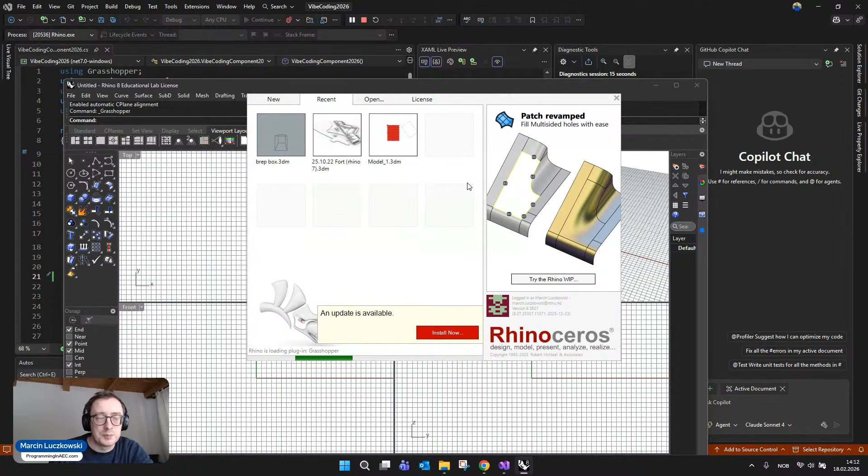Let's see if it's working. I'll click play on Rhino 8 Netcore, clicking here at the top. The code is debugged — you see Visual Studio starting to follow the process memory, and it's opening Rhino. I wasn't clicking anything to open Rhino, it should automatically pop out in your window. Now I can close the default file, and Grasshopper is opening.

The Kris Course 2026 category is already visible in my top ribbon. There's no icon yet, but in the vibe coding subcategory we have the Vibe Coding Component 2026. It has no inputs and no outputs, so it seems like everything we've done so far is correct.

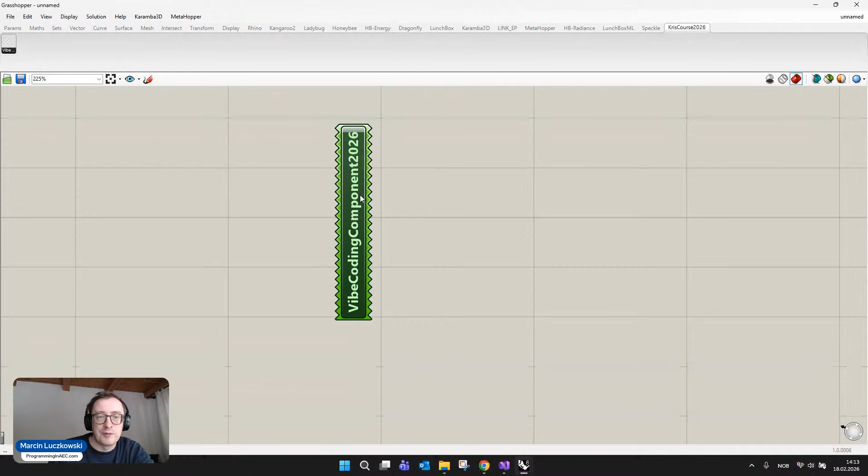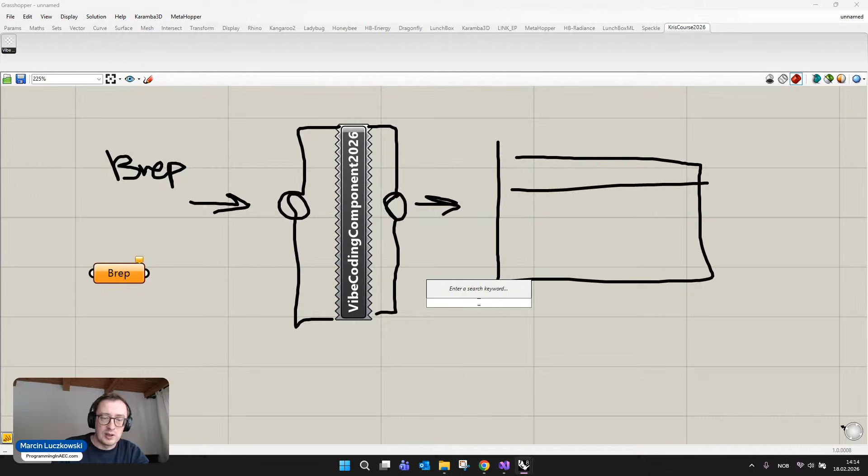Our task right now is to create some kind of input and some kind of output. To explain briefly, we'd like to have a BREP input here, and a string output connected to a panel which will produce IFC code. Later we'll change it into automatic generation of the IFC file. So we want a BREP input and a panel output. That's the task for at least the next half hour, up to one hour.

I'm going back to Visual Studio. I'll stop debugging, so I'll completely stop running the code.

I have GitHub Copilot. Some of you have the free version — I think if you installed Visual Studio recently, it should be automatically installed there, next to the Solution Explorer and the Git changes.

You probably don't have all the same types of AI agents as me, as far as models go. I like to use Claude, whatever version — it could be Opus 4.5. If you don't have Claude, you can use GPT 5.1 Codex. I'd recommend using the higher version of GPT with the Codex acronym, they're a bit better for coding.

But today we won't be creating a really complicated software architecture, so the choice of AI agent is, I'd say, a secondary question. The most important thing is to start working with it.

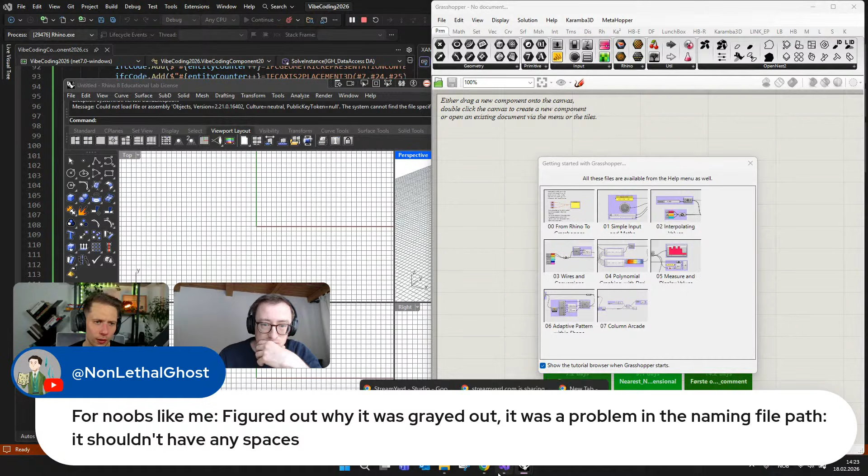We ran into a problem: the 'Creating a project has finished' option was grayed out. Someone already figured out it was because the file path name had spaces in it, which shouldn't be there.

Someone also asked why Visual Studio doesn't show the Grasshopper template, and which plugin is needed for that.

We explain this in detail in the movie we sent to all of you.

But just to let you know, you have to go into Extensions, then Manage Extensions, go to Rhino, and install the project templates for Rhino 3D.

We have a really great audience here — they already answered the question. You also need to restart Visual Studio after installing the extension.

One more question: how do you connect Copilot? Is it default in 2026? I think it is by default, because I just installed it and didn't add anything extra.

So it's supposed to work, but of course it would be nice to have a GitHub account, since GitHub Copilot is connected with GitHub.

It's hard for me to say if you need to be logged in, because I always log in, but I think by default the whole thing should work without installing anything extra.

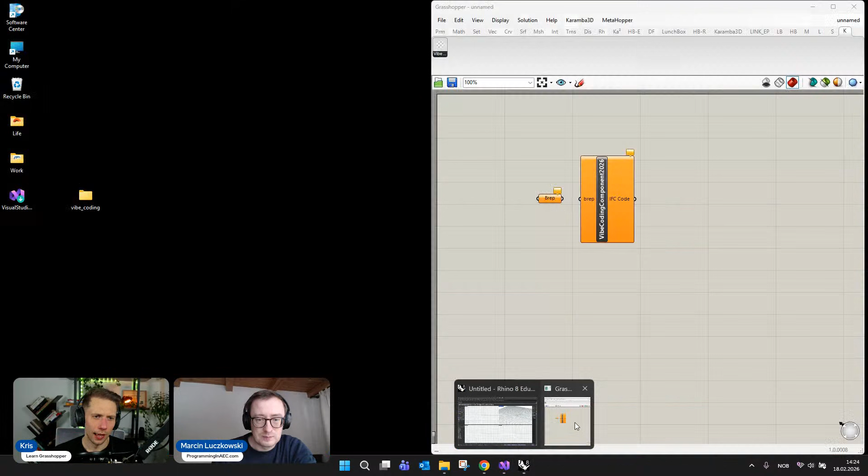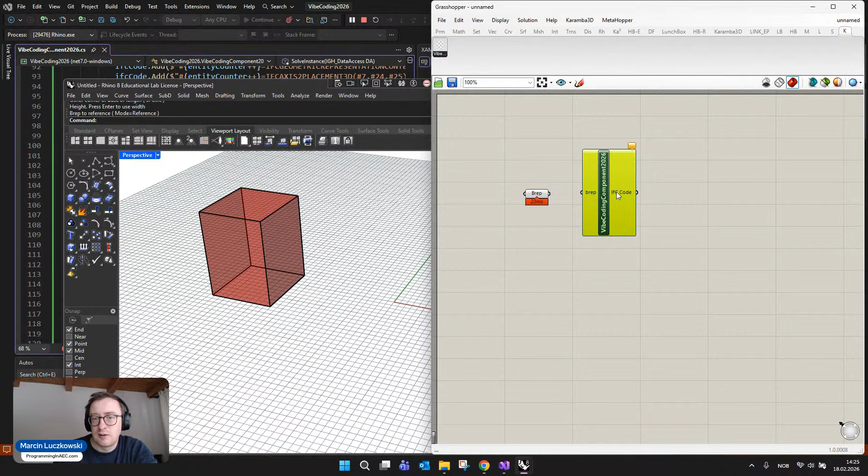Okay, so we got something going in Rhino and Grasshopper. As you can see, we added an input and an output — the input was manually created by me, and the output was created already by the AI model.

Let's try to work with it. I just generated a random brep, some kind of box, and I'm bringing it into my brep container and connecting it to my Vibe Coding component 2026. A good thing is it's not turning orange or red — it seems like everything is performing well.

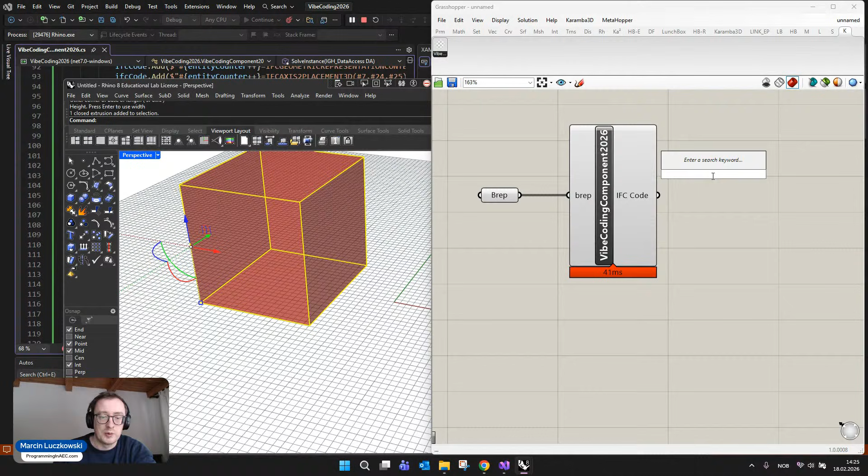Then I'll go for the panel and see the IFC code. The IFC code looks promising. I'll go from the beginning to the end — it seems like something which could possibly be an IFC file, but let's try to validate it.

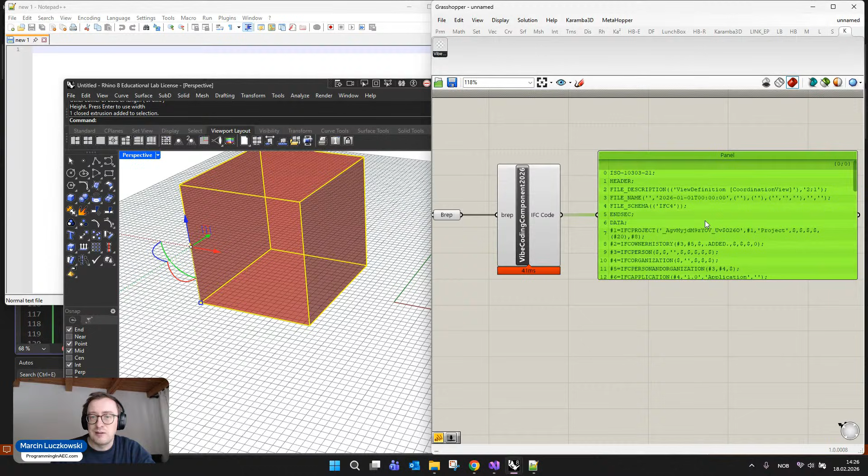To validate it, I'll open Notepad or Notepad++, whichever kind of Notepad you prefer. I'll copy the data from the panel and paste it here.

I'll save it as an IFC format, going into my Vibe coding folder and naming it model1.ifc. After this change, I should have model1.ifc in my folder — the file icon looks correct, but let's see if it's actually working correctly.

I'll open the browser, whichever one you're using. There's a very nice thing recently done by the Building Smart community — the Building Smart IFC verification, I think it's called.

Yeah, the IFC validation service — something like 'Validate IFC now.' You don't have to have an account there, I believe, or if you do, you can create one.

You can upload any kind of IFC file to see if it's properly done according to the newest standards. So I'll bring my IFC file, upload it, and validate it.

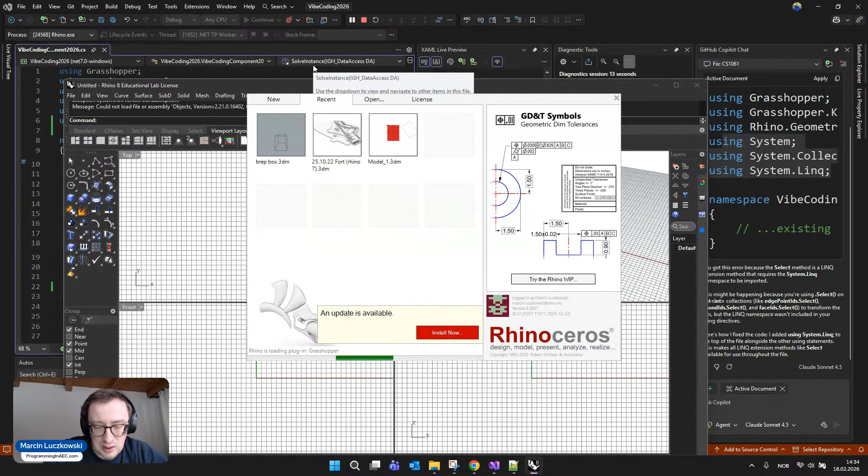The integration with GitHub Copilot is extremely efficient when coding your own components in Grasshopper. It's incomparable to using a classical ChatGPT in the browser and copy-pasting files from there to here. But obviously that's also possible.

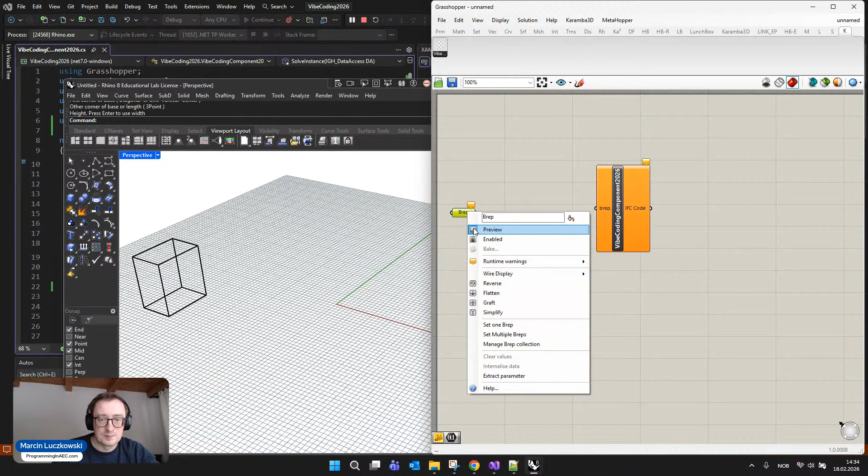Let's try if the code will work now. I'll create some random brep, take the code, copy data only, and put it into the same file. I'll just save it.

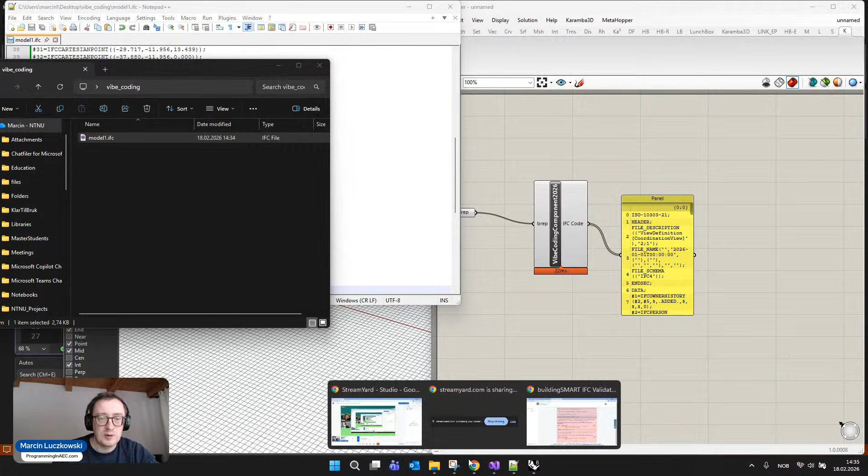Let's see, I generated it right now, so it should be fine. I want to revalidate it, to see if I fixed all of the issues. Probably not—I don't think he'll fix all of them. I'd be shocked if he did, but this is generally how we have to do it until we see the IFC model. Well, he even created more issues here, something expected.

I'll first check the normative IFC rules. He created 3 issues here, and also one with the IFC schema. Let's see how many there are. Again, exactly the same thing—first I'll fix the IFC schema rule.

I'll copy it and put it into Copilot, saying that the code is working better, but I still see some mistakes.

Please check the images. Well, I try to be as polite as possible, not because I'm afraid terminators will come some years and kill me because I was too harsh on the AI model. It's rather that I like to work this way also with my partners at work, so I try to be as humble and polite as possible.

I'm just copying this data. Right now I'm doing it a little bit manually, as you can see. In a second we will create an extra code which will save it as the IFC. The reason I want to do it like this right now is because I want to control where the error is. If I were very positive about the AI models, of course I could try to do it from the beginning with one big prompt and wait for the perfect solution.

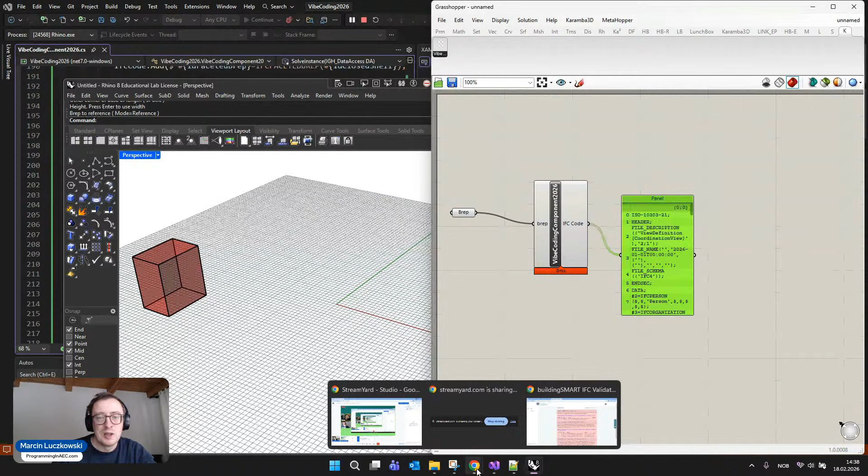But I will tell you truly, it was never working until now. We can change this kind of methodology at the end of this tutorial, or you can also check it by yourself. But yeah, let's try to see that the IFC has been generated.

I will go again into the IFC validation of the file. I will again put here my model1.ifc. I am waiting for at least 2 green marks, but you never know.

So in the meantime we have some questions, so maybe we can answer. Does this work with Visual Studio Code? Very good question. The whole workflow - the Visual Studio Code I'm mostly using for Python coding.

I was trying with C#, but still I think for C# Visual Studio will work much better. Well, I think the new Visual Studio Code - I don't want to lie, because I was using it half a year ago - there was a possibility to create plugins, but not in such an efficient way. It means you couldn't break it, you had to rebuild it always. So you were wasting some, I don't know, 20-40 seconds, and you had to open Rhino a little bit more manually, but maybe something has changed.

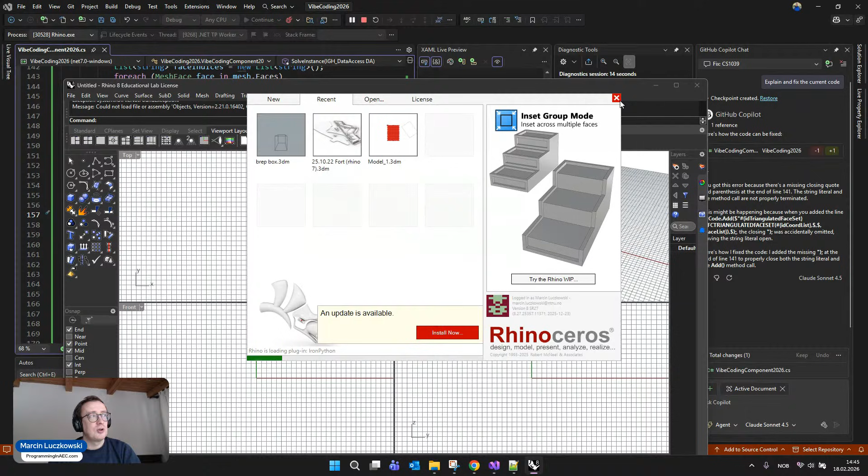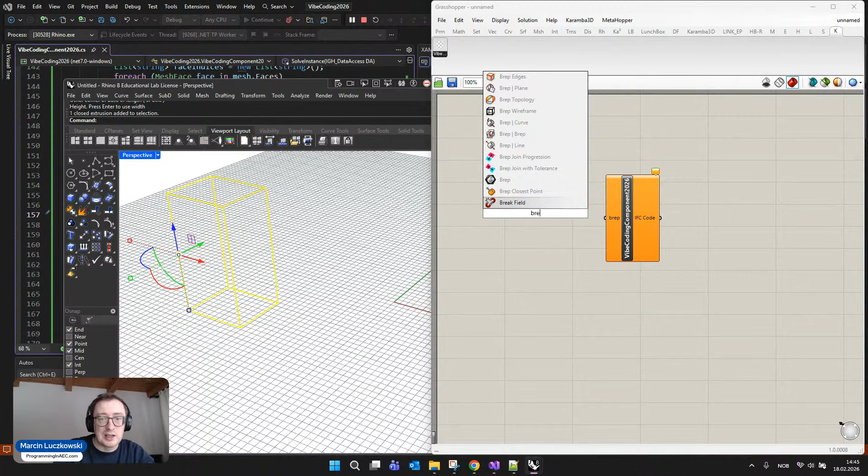I will not lie to you, in more complicated codes very often he's proposing wrong solutions, but still I think he will get better and better. The more you work with it, the more you know what you can expect, and the more you know how to push him to give you a better solution. But also, I don't think a person without any C# coding skills can really code even with AI models, but maybe this will change as well. Maybe I will have to change my job soon as well.

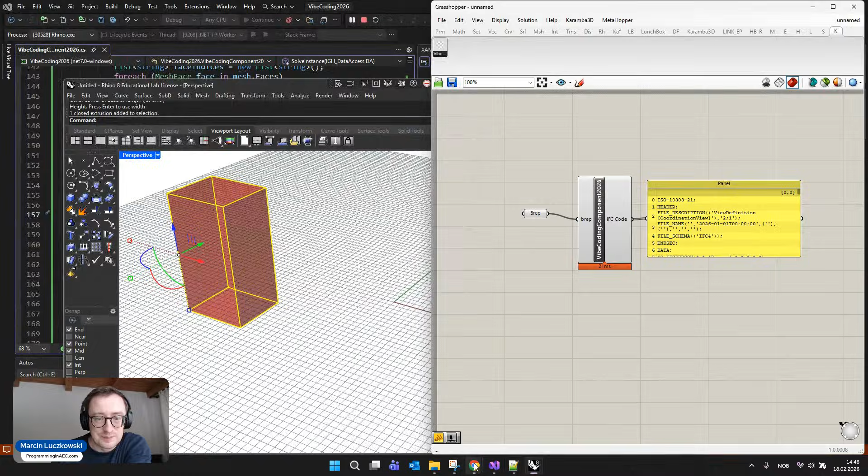Well, let's go and check the file. I'm saving it. Hopefully this is the last time when I'm validating it, really. Even if it's not fully perfect, I think we can try to preview it. So I will just take this IFC. Sorry for that, I was too fast in dragging and dropping the file.

Also, you can see that the first time when we pushed it here, it was around 2 kilobytes. After some iteration, it has 4.8 kilobytes, to make it accurate into the step syntax, IFC schema, and the normative IFC rules. So hopefully soon we'll have a perfect file. Well, not yet, but let's see the IFC schema, one last mistake.

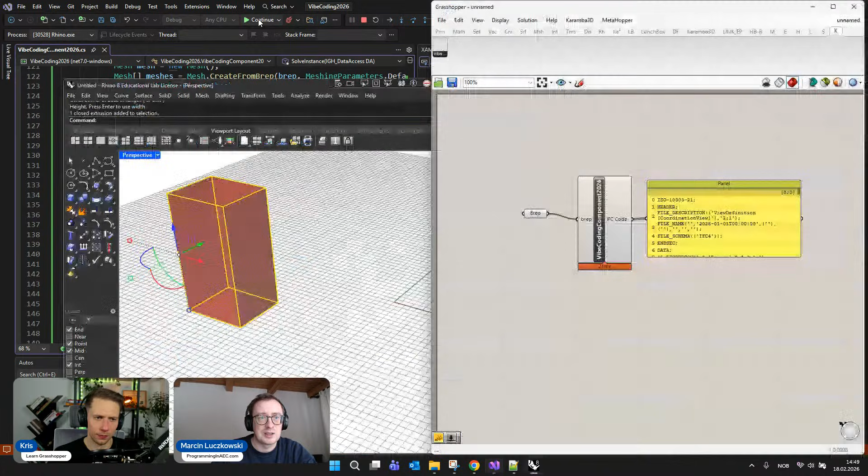Obviously he's connected to the internet and has access to all of the available IFC formats. So in my opinion, with at least how it is sold right now, that AI can do almost everything for you, well, it is showing that it is as good as the validation and the project which you have to do anyway.

And we have a good comment to that. Richard said: though vibe coding is handy in producing code quickly, knowing how to code is beneficial in guiding and prompting the AI correctly. This is also an outcome of this session, that even though code, as Marcin said, can be produced really quickly and really great, you have to validate and check it at the end. So programming basics are really necessary here.

Richard also mentioned the hot reloader C# component. Have you tested it, Marcin? He wrote that there is no need to break and restart the debugger in order to test new changes to the code. This also avoids restarting Rhino Grasshopper.

I don't know if it's because of the project I was actually testing it on, since it was quite a decent project, but in my case it didn't work so well with this hot reloader. With small plugins like we're doing right now, it works perfectly, but on bigger projects, when I have to communicate with different individually made libraries, I was not satisfied.

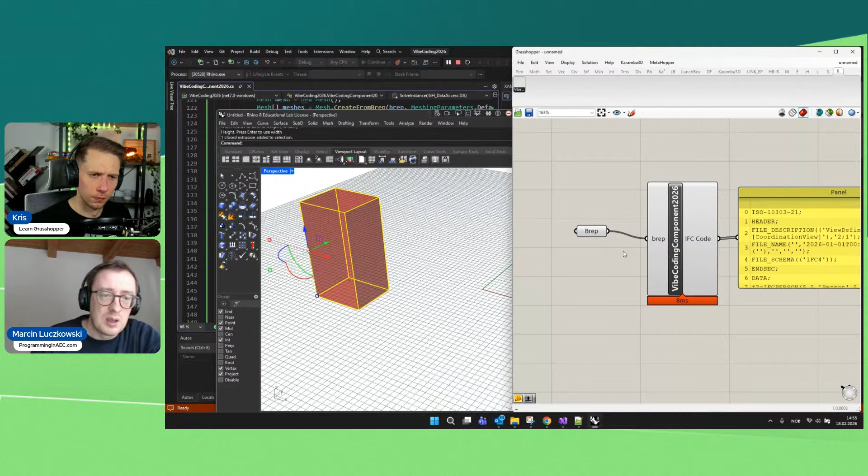To do that, I will just stop debugging for a second. I want to work with Copilot and ask it to do a couple of things. First, I definitely want to have production of the IFC file in a specific folder. So please make me one more input. The input should be the file path for the IFC file, which will be automatically created when I am adding new breps.

The second thing is that the brep input should now be using not only one, but a list of possible breps. Apply those changes in the main.

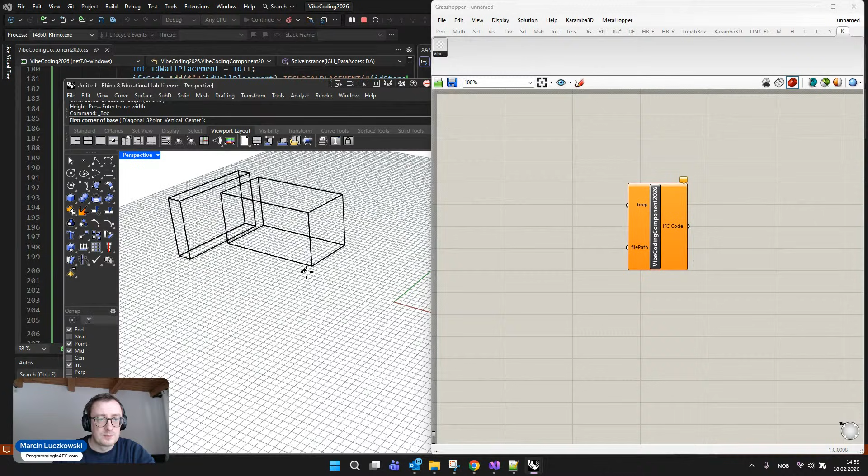Let's see. I will also just test it with some breps. The file path — let me select maybe an existing file path. I will just go into my... where is my vibe coding stuff? Model 1 IFC, let's open it.

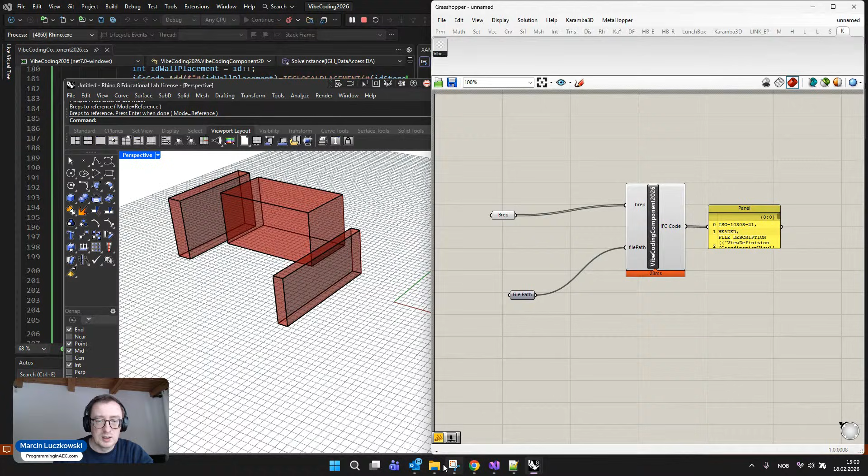IFC code — well, I don't have to, I'm just checking if he produced it, but generally here we should see that it's already created. Yeah, 3 o'clock almost. So the only thing I have to do right now is move back into the viewer, and I would like to upload a new file — I want to bring my IFC here. Let's see.

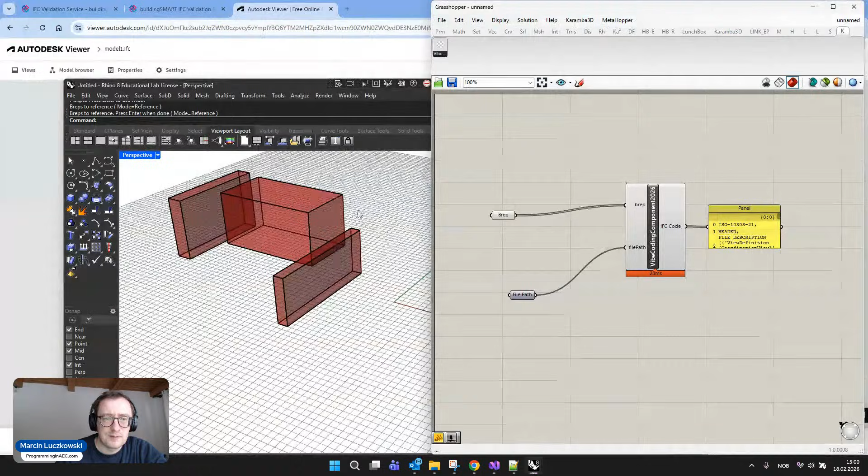Hopefully this will work in a second or two. So, is it exactly the same? I believe they are a little bit farther from each other. So one problem here — probably he's using a new coordination system for each of the objects, and we have to tell him to use one global coordination system for all of the objects. Let's try to see it in the code.

I will just pause it for a second. So, I should use the vibe coding — I should use the AI model to do it. So, the code works...

Very well, but I see that the objects in IFC are using a different coordination system. They are a bit too far from each other. Let's see — probably... I know this issue from before, so I'm quite sure he will fix it.

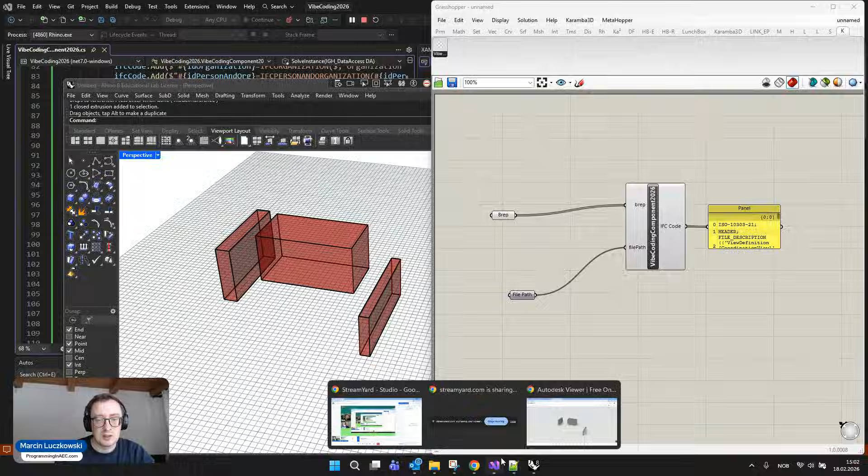But as you can see, still after some time, okay, so he's using millimeters, he's changing it to... okay, so he figured out that those are meters. That's also one other issue that I thought it would be, but he's right — if the distance is a little bit bigger, then probably this was the problem. So I'm just clicking recompute, opening the viewer, uploading a new IFC file, and let's see.

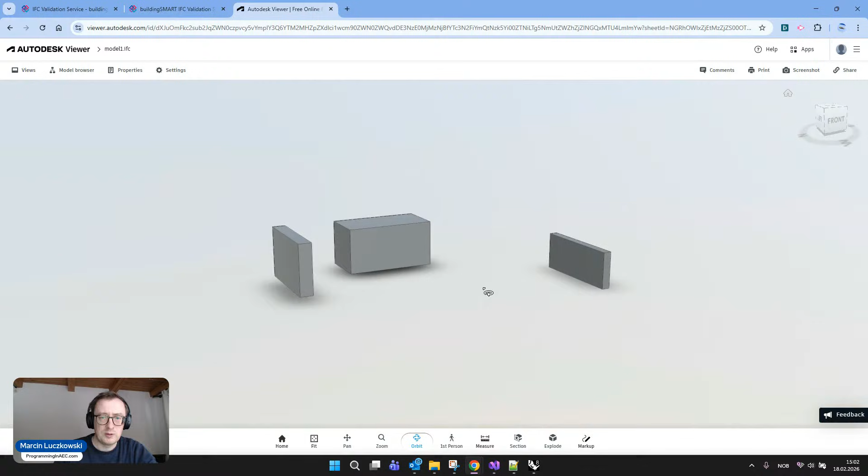Well, still too far away. So let's try to push him a bit more. I will just check if he was using the newest file, so I will go back into Visual Studio.

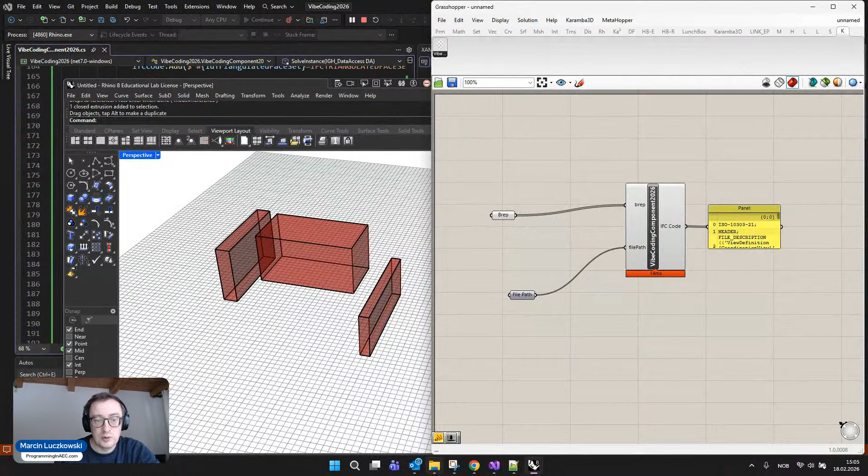I'll just break it and play it again. So after this small change, I can rebuild my IFC file 5 after 3. This is exactly the file which I want to use. And let's see.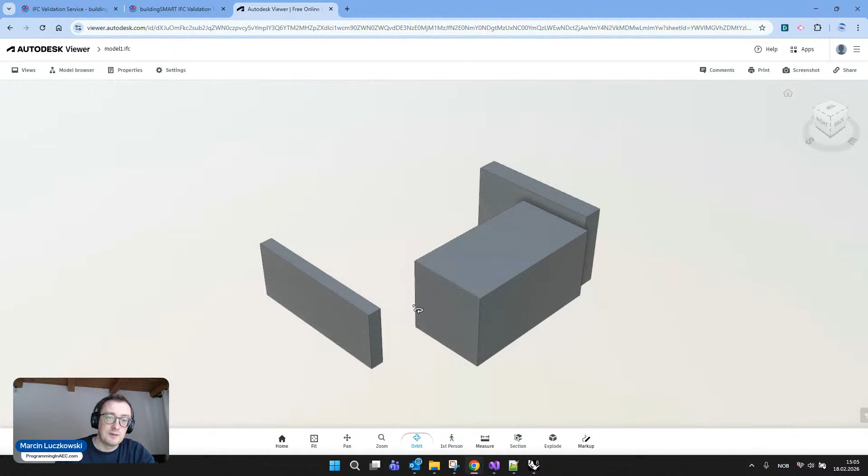All those small issues which are making all this, but let's see if it's... yeah, now it's much better. So what we can see actually here is that we create objects. We can just create a model browser. We see that we have the IFC site, building, story, wall, and then we have 3 types of the wall objects.

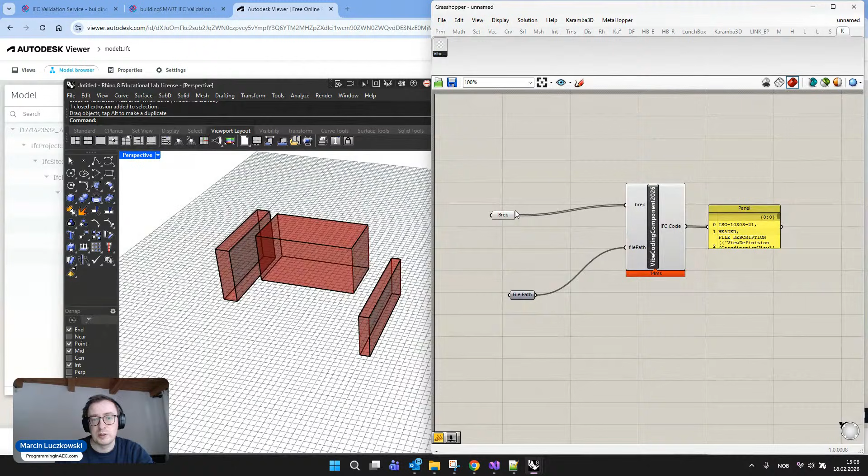So we created quite nice stuff. We created any kind of the BREP object, more like a wall system, and then we will try to create it maybe a little bit more complicated. I would like to have one input for the BREP walls, one for the BREP floors or slabs, and by this we would like to also create IFC wall and the IFC slab in the system.

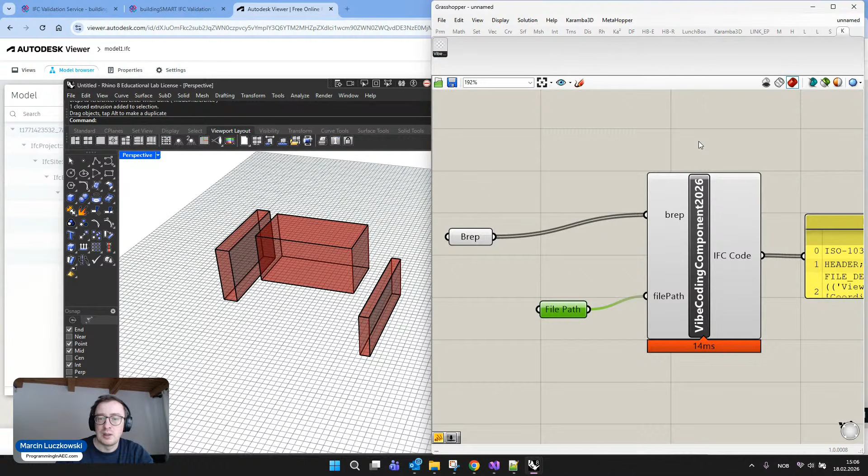So I will go back into the coding, and unfortunately I will just stop debugging right now. I don't want to just break it, because I want to apply a little bit bigger changes. I want to go also outside of the main instance of the class. I want to create some kind of the methods.

Well, the main code is working very good. I want to make some changes. I would like to have one more input, also a list of BREPs, but this time for slabs. Also, I want to have an IFC code adjusted to it. So BREP slabs are IFC... I don't remember if it's floor or slab, IFC slab category, I believe.

Yeah, and maybe one more thing. I would like to have one more output, and this should be warning, or not warning, but it should be information when the IFC is created, generated, and saved in specific folder.

If the code is working as predicted, let's see. We will have 2 inputs and 1 file path. I will go for the file path.

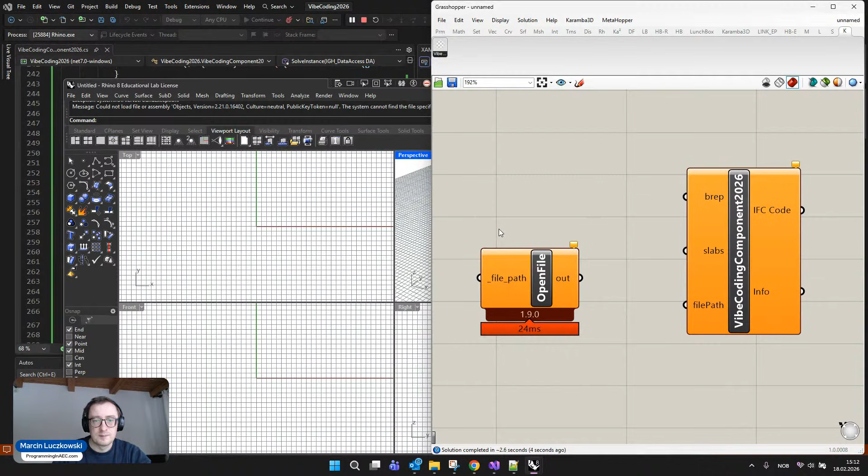So I will choose my IFC file. What I will do, I will also create some breps, maybe different for the...

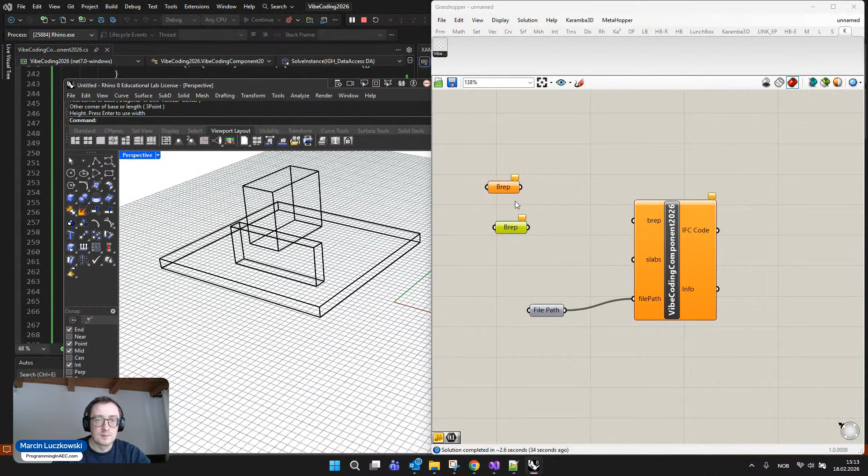I want to maybe just see if those will be the slabs, set multiple, and those two will be my breps. I should change it to the walls name, but let it be.

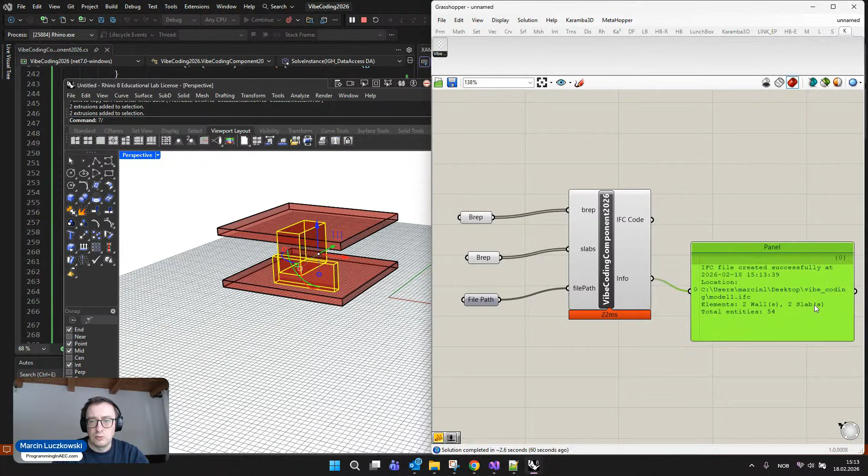Let's check the new output, which will be the information. And file created successfully: 2 walls, 2 slabs. Well, makes sense. Let's try to just validate it.

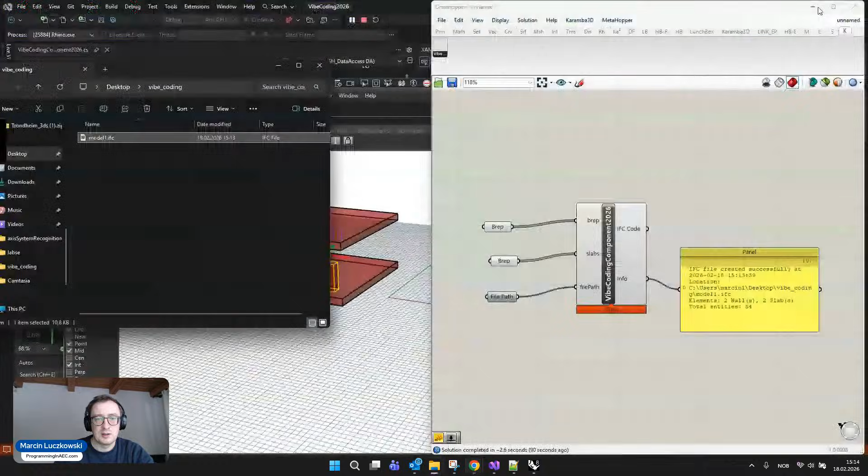I will just upload it here, and let's try to check if everything is working well. Yeah, seems to work correctly, so I think we can just believe that even for more of the objects, it would work as well.

Right now, let's try to - I will just save this Grasshopper file, brep to IFC, and I will just save it.

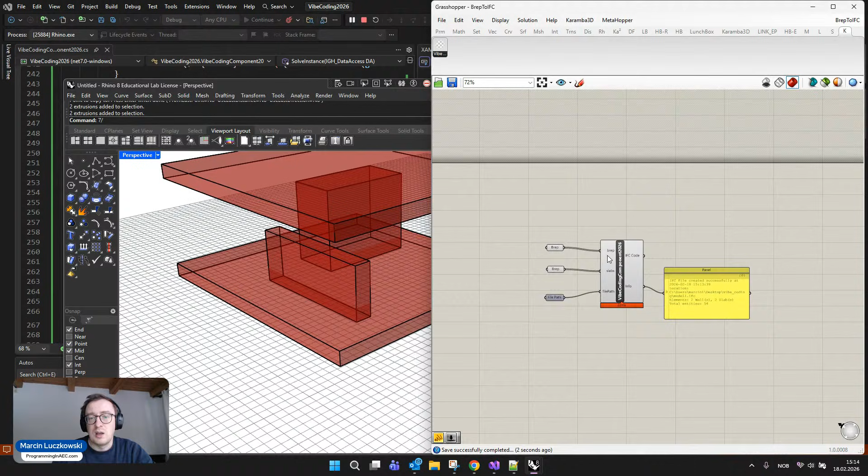Well, in that case, we have let's say 90% of the code ready. We are generating the IFC files. We know also how to add the new categories, or the AI model knows how to do it. So the next thing I would like to do is create generally a system in which he will try to automatically recognize if the brep is a slab or it is a wall.

So let's say like this. I don't want to modify this code. I want to create a new type of component, a second component. And in this case, unfortunately, I have to click stop debugging.

I cannot just break it, because I will be modifying deeply the architecture of the whole plugin. So in that case, I need to add the new component. I will show you how to do it.

Manually - I was searching for the word how to say it, not with the AI. So manually, I will go for the component, add component. I'm right clicking on the vibe coding, and then I will search for my Rhino empty Grasshopper component.

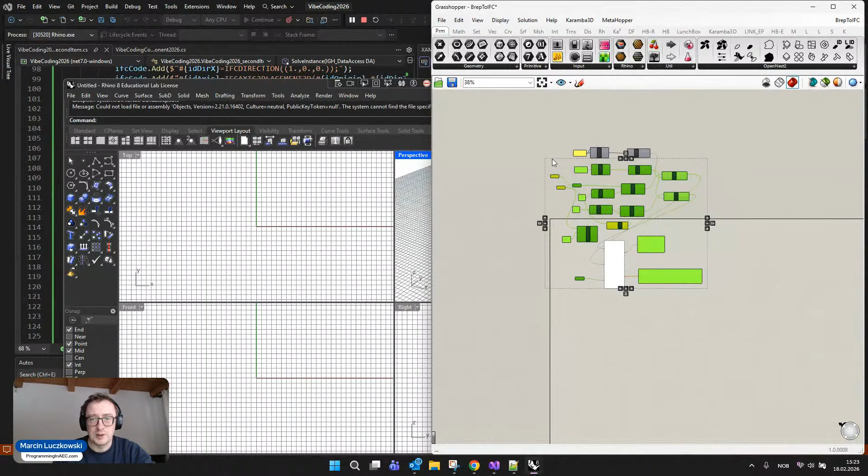So right now what we have, I can just use the brep to IFC, close, yeah. Sorry, it's my old code, I should not open it.

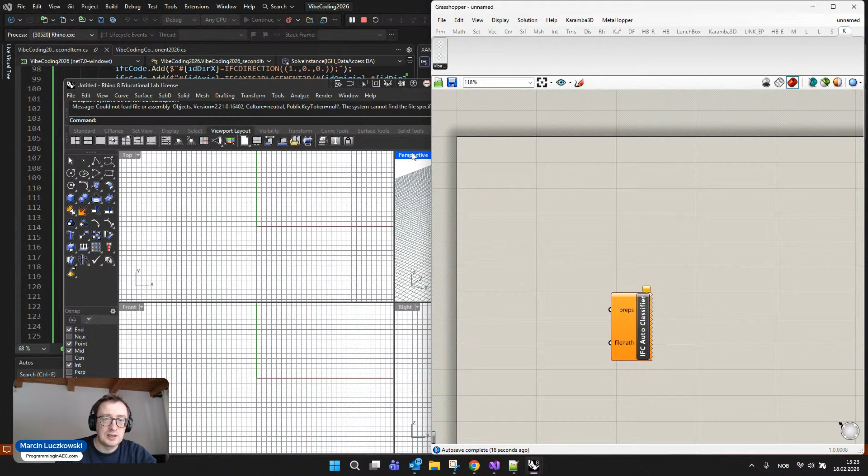Let's see, so right now we have two components: IFC Auto Classifier and the Vibe Coding Component 2026. You recognize this is the new one - we have breps and the file path. Let's try to use this one this time. As I was saying, it should automatically recognize what is what. Let's try.

Let's give it maybe also something here - brep. Those breps will come here. File path. Select the one existing - well, I will choose this one.

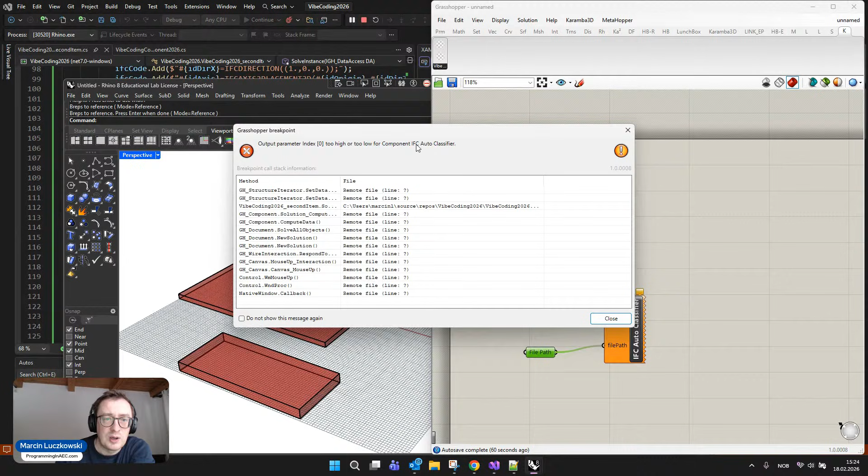Oh nice, so it has some issues. Output parameters index 0 too high or too low for component IFC Auto Classifier. Good, this means generally - or I can take a look if the code was... oh, it doesn't have. Okay, let's see.

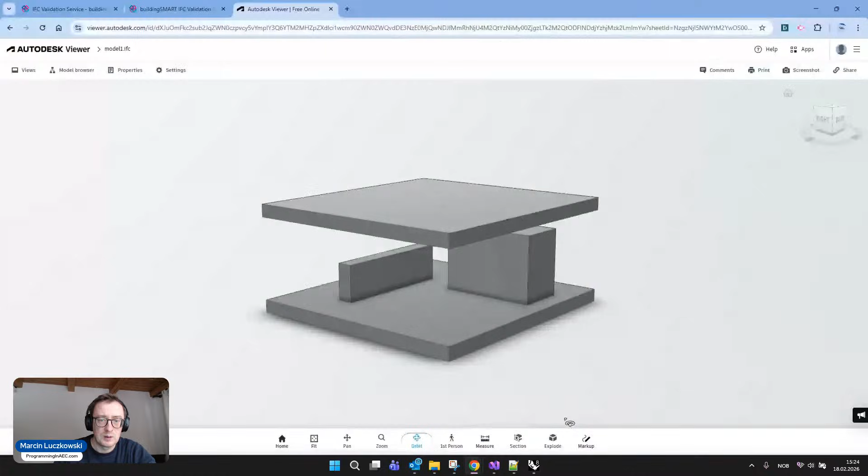Let's see, my vibe coding - 1524, this is exactly what I want to see. So I will just bring it here.

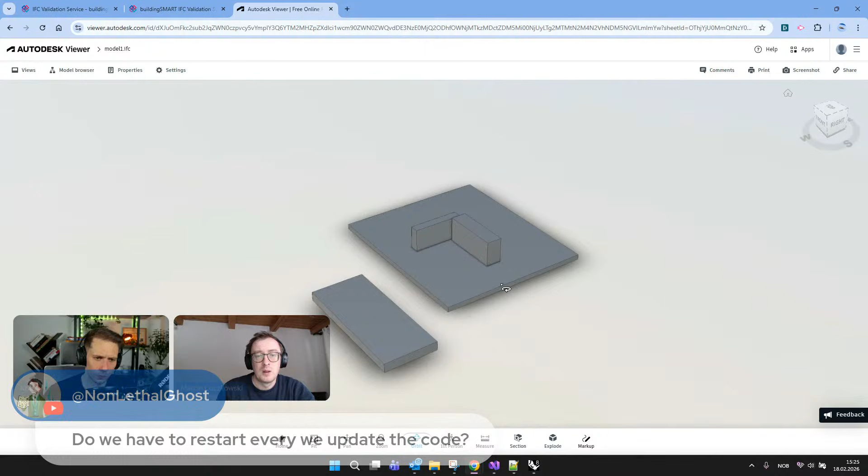There is a question: do we have to restart every time we update the code? Not every time - maybe I will just check in the model browser if it's done correctly. Just give me a second and I will come back to the explanation. So we see that although it looks like it exported the slab and the wall, everything is slab here.

So the code unfortunately is not working exactly like I would like it to be. But now let's get to the explanation about breaking, and how breaking works - or just stop debugging.

The rule is that whenever you're adding a new component, if you will - right now I can just break it, so Rhino and Grasshopper is not closed, it's still working, or it's in pause mode, let's call it. Then if I go into the Solution Explorer, right now I see for example one component and the second component which has been generated. I can modify them, but at this stage I cannot add a new type of component, for example, or change the classes.

It's pretty basic tutorial, so I don't want to go into class definitions and how you should create them. But to answer shortly this question, which could be really long - not always do you have to break. If you're making small changes, you can just break it and click continue inside of the solve instance. Whenever you're going to add a new component, then you have to rebuild the whole plugin - so you first stop and then rerun it again. And I think with hot reloading, it will be exactly the same very often.

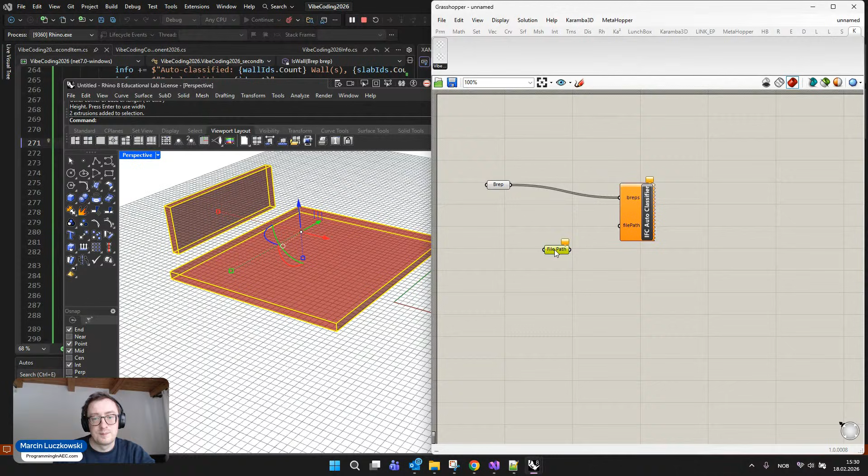I will connect the file path, and let's go for the Model 1 IFC. Oh, this is something which I thought I will fix.

Let's show me the code. It seems like he's still... oh, okay, now I see. This is actually the mistake which he has done. He is putting the DA set data list, the IFC code, and DA set data 1 info, but he never created, I believe, any output parameter here. So he's referencing something which doesn't exist.

Well, quick fix for it, I will just comment it out in break mode. It's not affecting on the... he's asking me to stop it because he's... so I can then just tell him: line 267 and 277, 268 is referring to non-existing outputs. This is a tricky part because until you run Rhino and Grasshopper, you will not see that this is a mistake. So you need these two lines of code, and then just keep it. Should be perfect now.

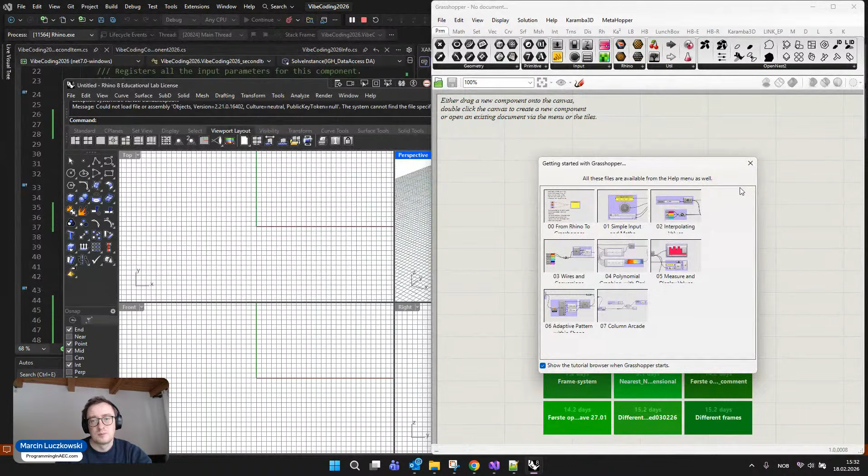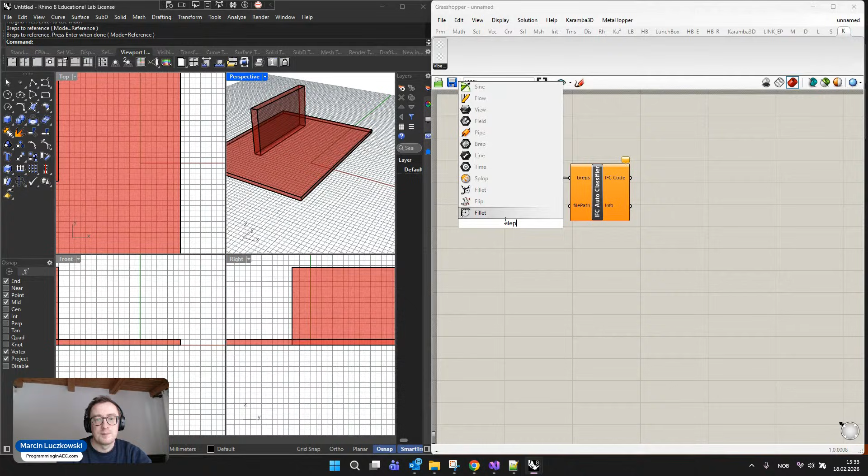Now, finally, we should have it. Hopefully the code will work as it should. Set multiple breps, the file path. The model is generated, the file we can take a look on. Hopefully they have correct categories, IFC categories.

This process can be really surprising for those who have been following AI and heard all the crazy news about what AI can do, and seeing in this live session how much back and forth, misunderstanding, and programming knowledge you need to have in order to program this. This can be surprising for many. Yeah, if we go into a discussion part, because slowly the code is finished, I hope he will succeed with this. But generally, the thing is that the coding...

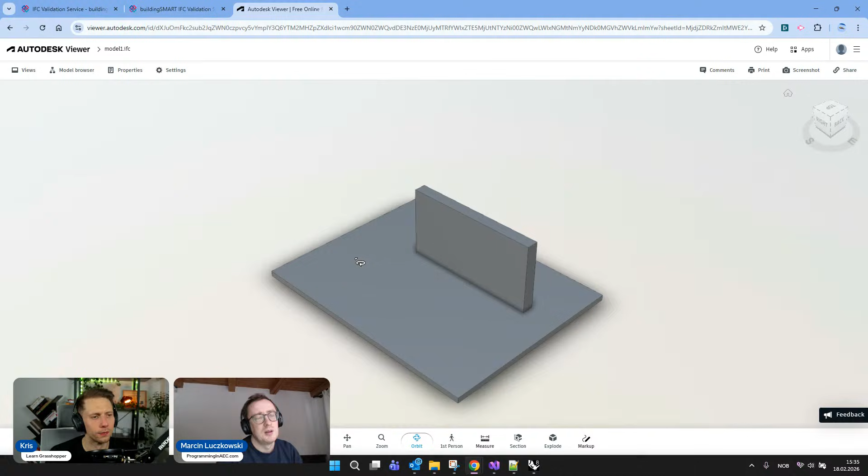For the IFC, we chose this by purpose, because the IFC format, although you might think it's a standard for the whole world, there are a lot of IFC files. When IFC 4 was released not so long ago, and now IFC 5 is slowly coming. So, let's see, I hope he managed to do it.

If there are still two slabs... oh, okay, then there is a wall and a slab. So lastly, if we have this thing working, then we can just try to make it a little bit more complex from the geometrical point of view. So I'll just click continue.

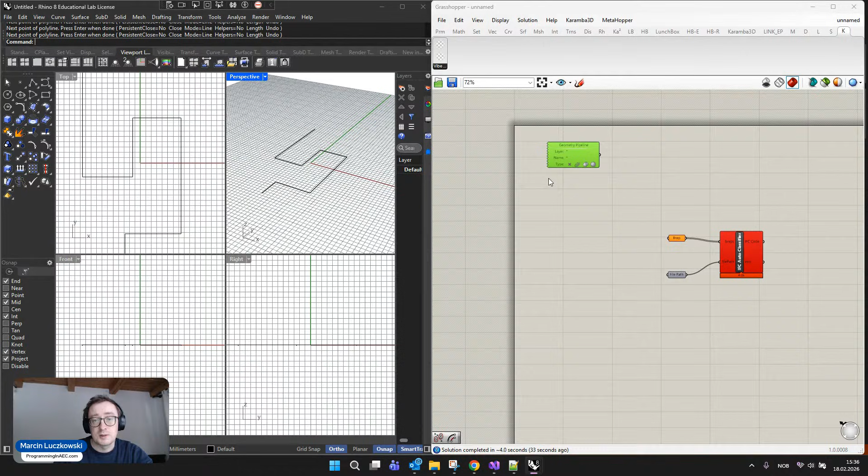He's saying that he doesn't have any inputs. I will just give him a geometry pipeline, maybe just to visualize what actually you can do with this kind of system. So in this case, let's say I will just create some kind of walls in the system. So I will just take it. Let's say I would like to explode it.

I would like to offset the curve, let's say by some specific value, let's say 0.2, let's say it will be in meters. Then I can just loft it. A few things—I would just make it more visible. I would just type curve.

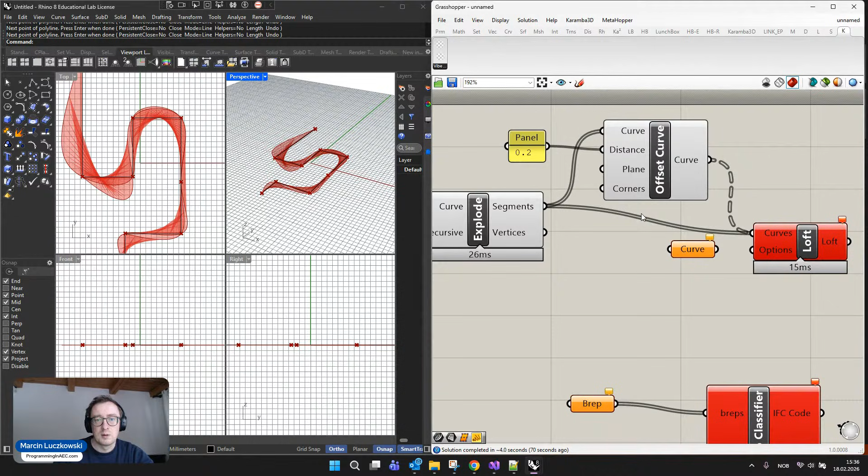And right now, as you can see, they are lofted. Then I can just extrude it by a specific distance. I don't know, 4.2 maybe, some kind of height. Of course, it should be the vector, sorry.

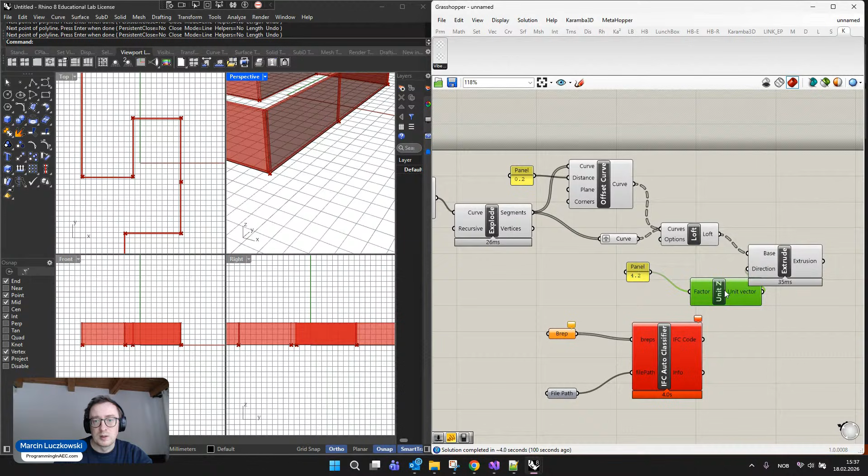So we generally have the walls. Let's see if I can just create some more of them.

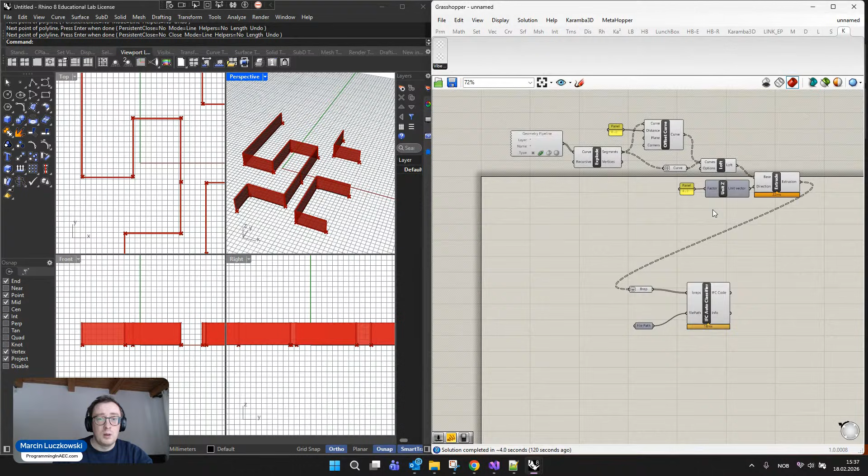So those are the B-reps. Right now they are already in the... I'll just flatten them. They are already in there as the IFC, but we want to create as well some kind of slabs.

So let's say I will just use the slabs, draw it manually, to not spend too much time on generating the geometry.

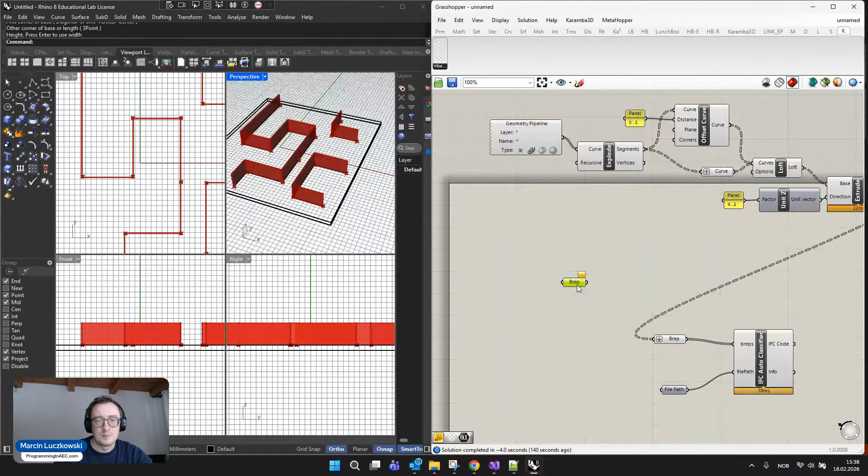And let's say that I will just move it with a specific series of vectors in the z direction. So let's say I would like to have this 4.2 as the step. So this one...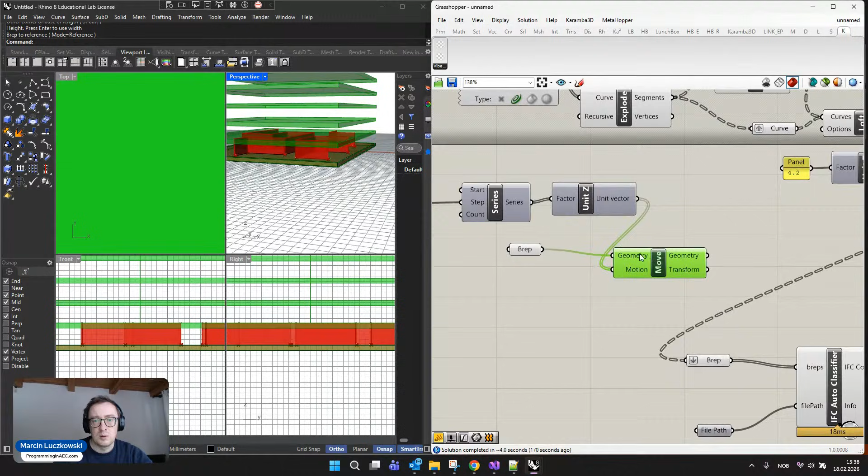Plus I just need to flatten it. Yeah, so this I have to graft. And I lost the BREP, so I have to just take it from here.

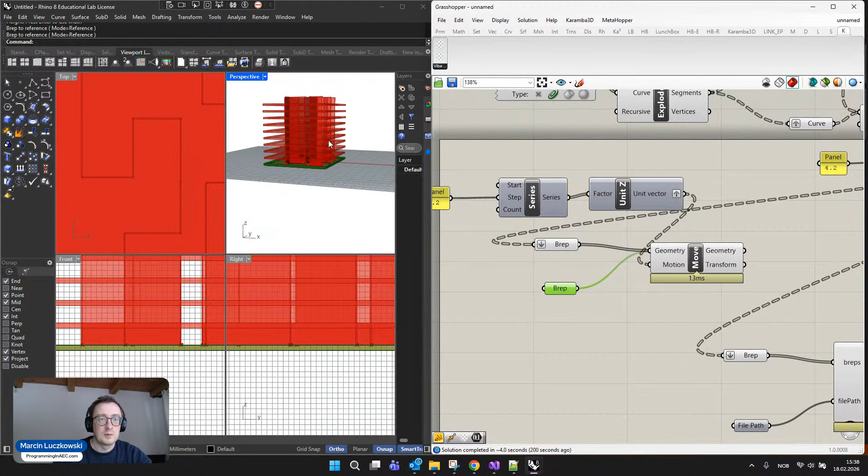Yeah, something like this. Let's bring it here. The file, let's check it. So, upload.

And let's wait a second. We will see if the IFC is generated properly or not. Again, this Autodesk IFC viewer, maybe it's not the fastest. Maybe I should use a different one. I don't care, in fact, it's just that it's free.

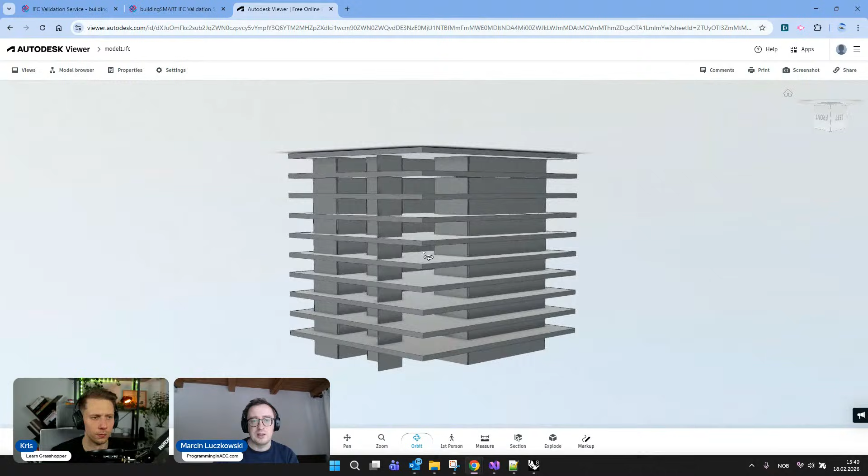So, when it comes to the discussion about how we could build this tutorial and how we could sell the vibe coding, well, I could choose a topic which is generally purely inside Grasshopper. So let's say I would like to use vibe coding to generate the geometry inside Rhino and Grasshopper without going to a different type of format like IFC.

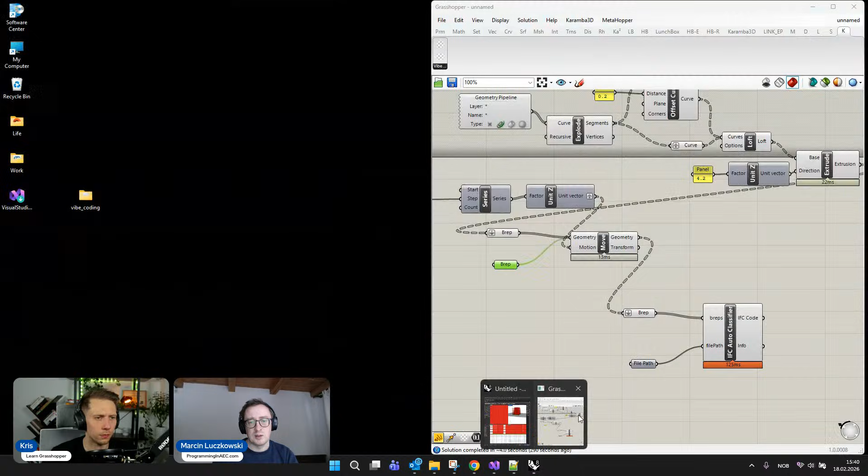Then it will be definitely much easier than actually what we have done right now. Well, you see that the code is working. We struggled a lot in the beginning to make it fully compatible with the new IFC standard, but somehow we succeeded. Right now, with any type of BREP, we also create some kind of differentiation between walls and floors.

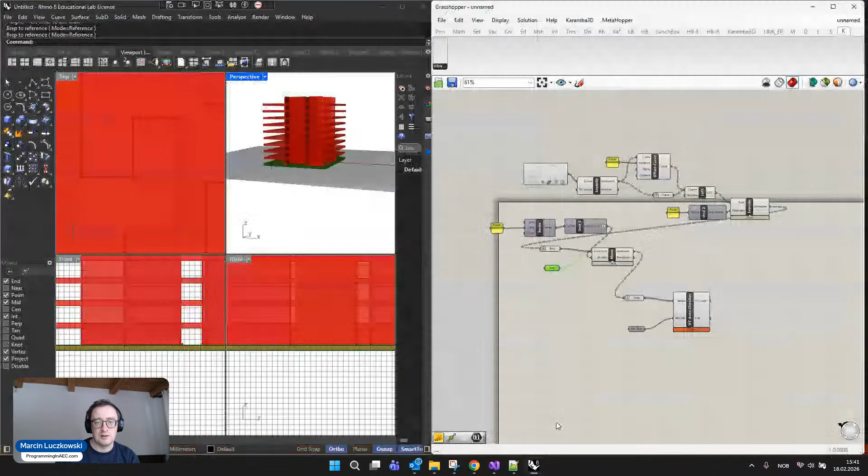Something like Rhino Inside, for example, then it's definitely possible, but you will have similar problems as we have right now with formatting properly the outcome, the output, the version, whether it should be correct or not, because generally here we even go easy with the topic of this session, since IFC has this IFC validation, which was really helping us in the beginning.

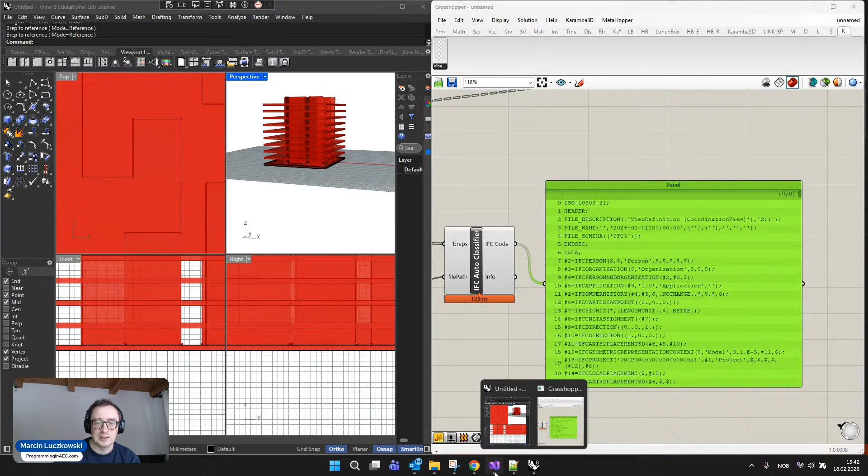The vibe coding in itself, inside Rhino and Grasshopper only, for creating this differentiation between if it's a wall or a slab, this works perfectly, and I think you don't need to spend so much time on debugging and stuff like that. But I think it would be not honest. The real issues you will have are when you want to create something practical, something which uses the formats which are in our AEC sector.

Is it just Kris, are there any questions? Should we show something more, or? Yeah, we can go to the Q&A session. We still have like 18 minutes to the end.

Thanks for this great presentation, that was really great stuff, I learned a lot too. Maybe after you set up everything, if someone would like to add new stuff to this IFC component, it will get easier and easier. As always, the first step is the worst one, and maybe it's easier after that.